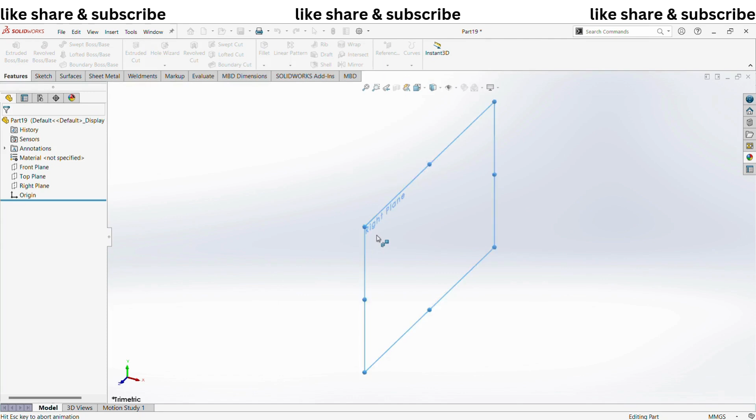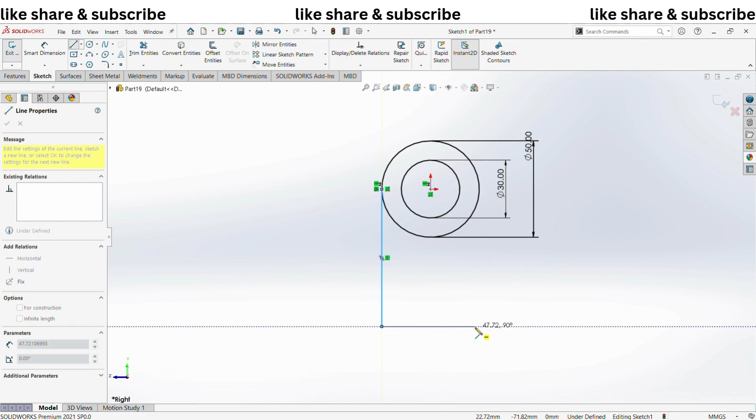Select extrude, select the right plane, create two circles, give the dimension 50 and 30 mm. Create line like this. Give the dimension. Overall height is 25 plus 10, 35, plus 20, 55 mm.

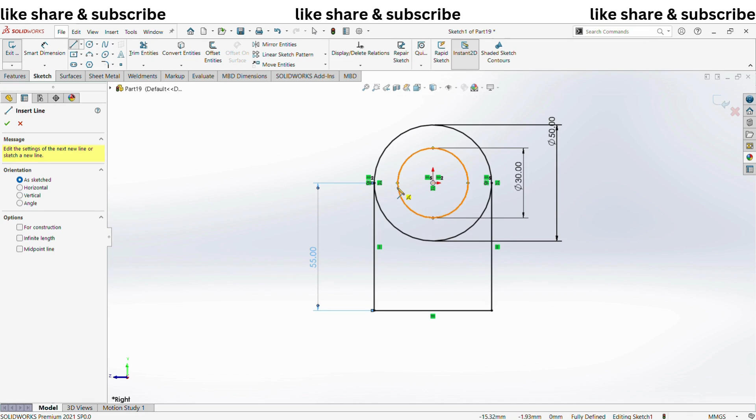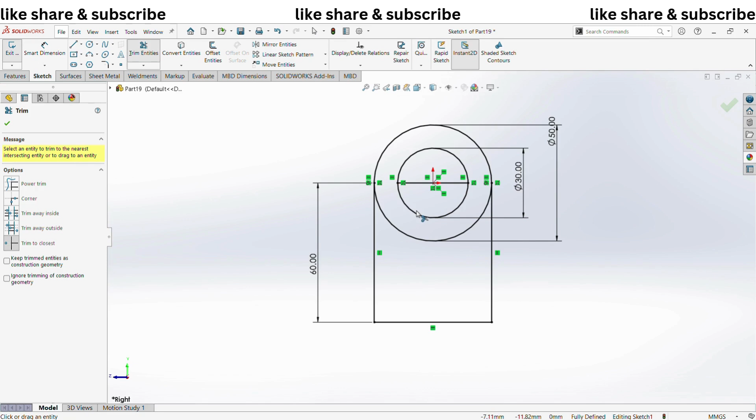Create one more line here. This overall height is 60 mm. Finish sketch. The thickness is 25 mm.

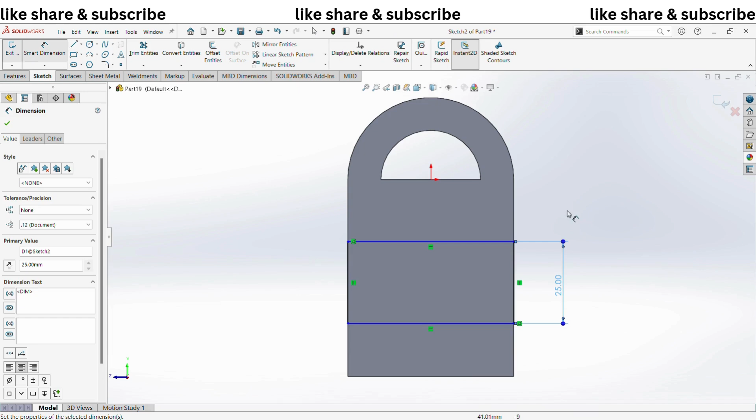Select this surface, sketch. Length is 25 mm. Finish sketch. Extrude 40 mm.

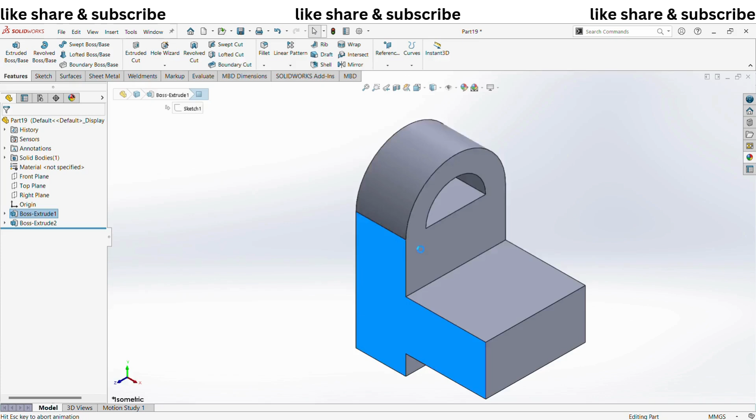Next, here there is a cutout. From the top 30 mm and 10 mm. Select this surface, sketch, create one rectangle, give the dimension. This is 30 mm and this is 10 mm. Finish sketch. Extruded cut. Here select through all. Okay.

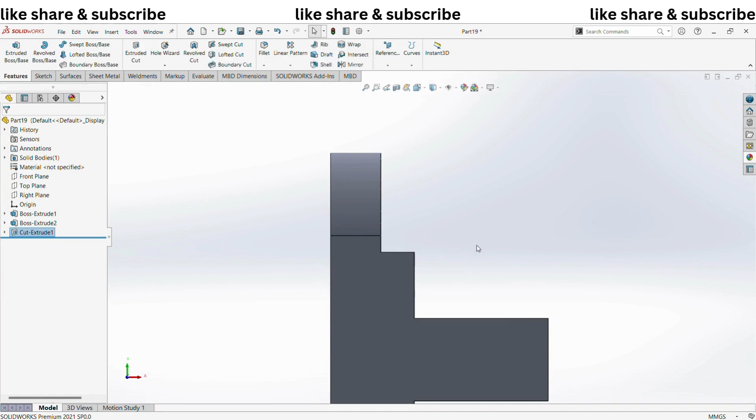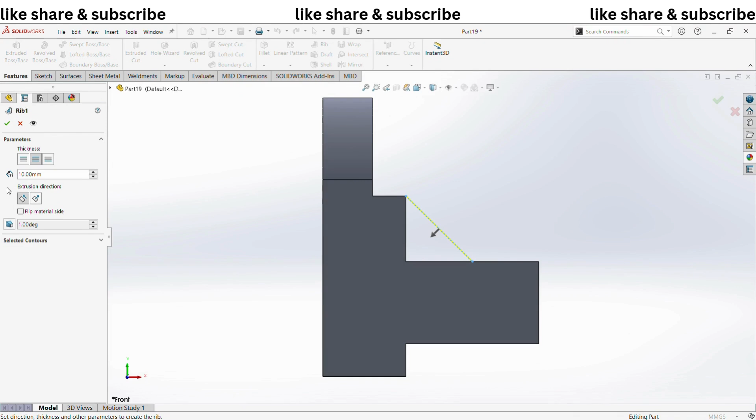Next there is a rib. For that select the front plane, sketch, create one line here, give the dimension 20 mm. Finish sketch. The rib thickness is 10 mm towards downside. Okay.

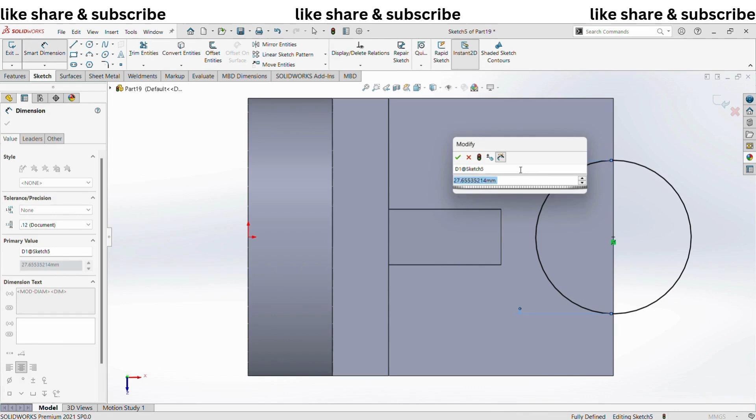Next here there is a cutout, 30 mm. Create dia 30 circle here. Finish sketch, extruded cut, select through all. Okay.

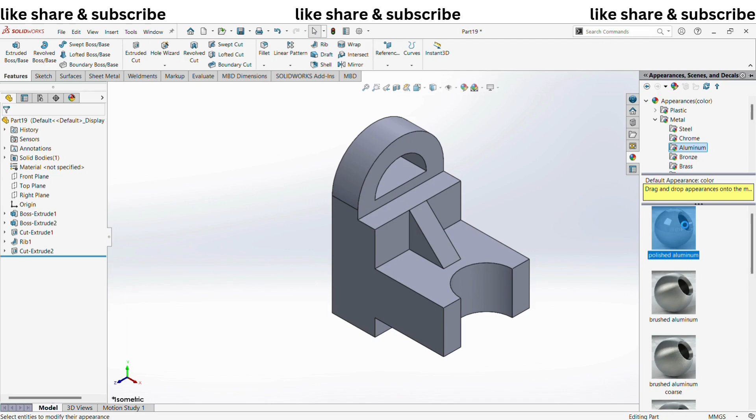So that's it friends. So now we can assign the material here, steel or chrome. Go to edit appearances, assign some color here.